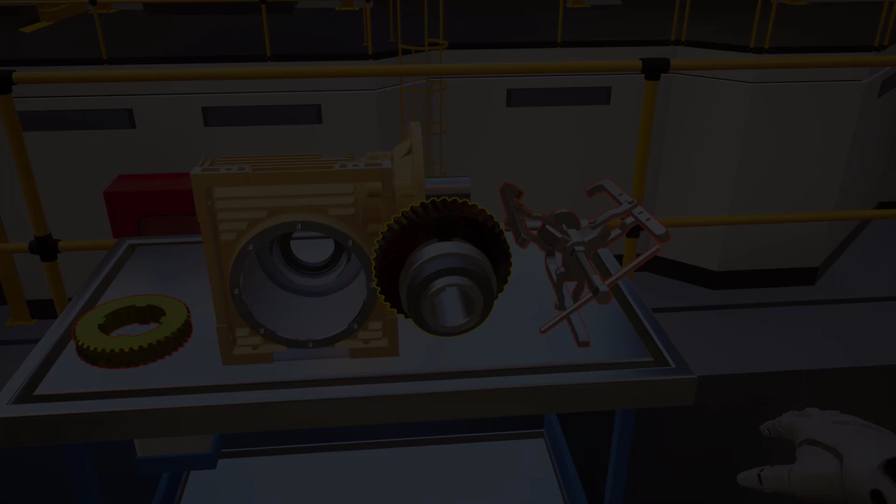In this tutorial, we are going to talk about two new features that take VR assembly to a whole new level: the utilization of subassembly, and the ability to have a custom assembly component that is controlled through the training builder.

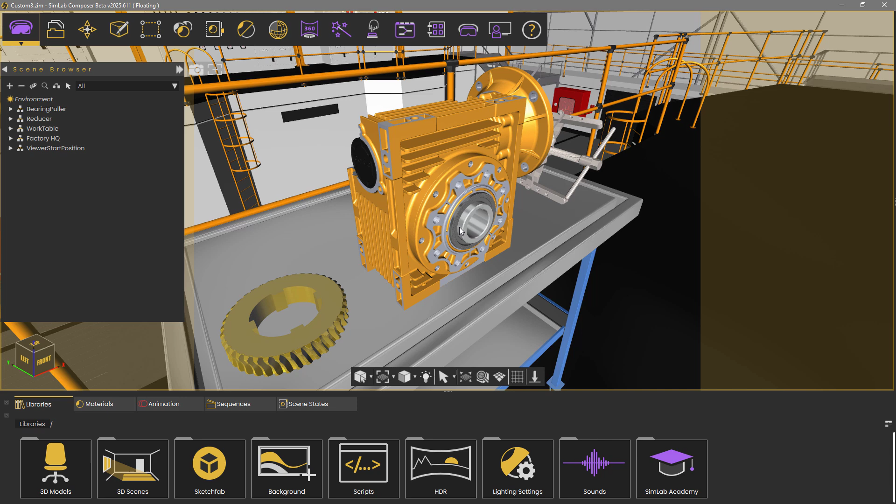What we have in the scene is a reducer, which we are going to disassemble using the VR assembly system. Let's talk about the order in which the components are going to be removed. First, we are going to remove the cover. I'm going to select it and press H on the keyboard to hide it and reveal the components beneath it.

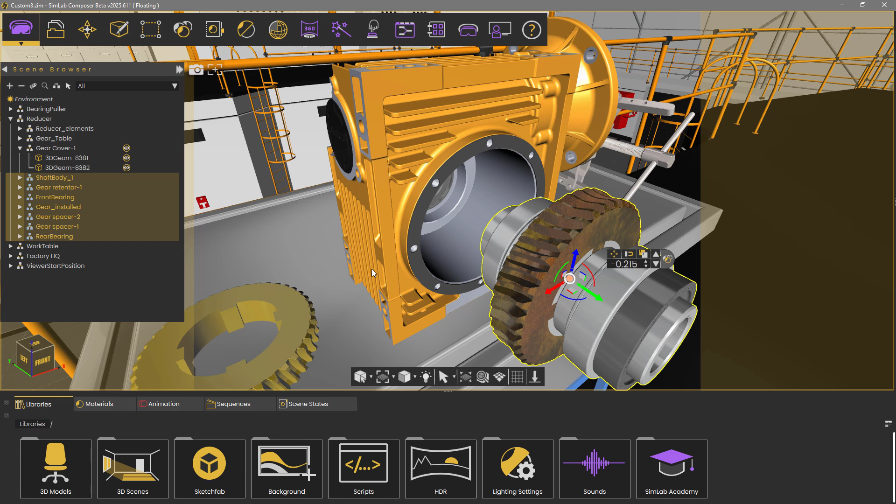Next, we are going to remove the inner components together as a single component, or subassembly. Then we need to take them apart one by one until we reach the rusty gear. Once we remove the rusty gear, we are going to install the new gear, then put the components back in the same order. Let's first create the subassembly.

We are going to select all the components that are going to move as a subassembly, and from the objects tree, right-click and select Add Parent. Rename the newly created parent to a suitable name. This is it for setting up a subassembly.

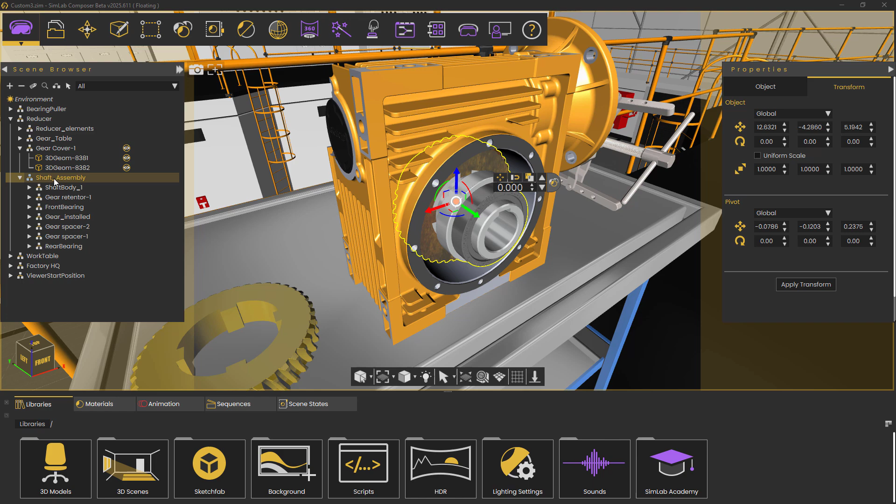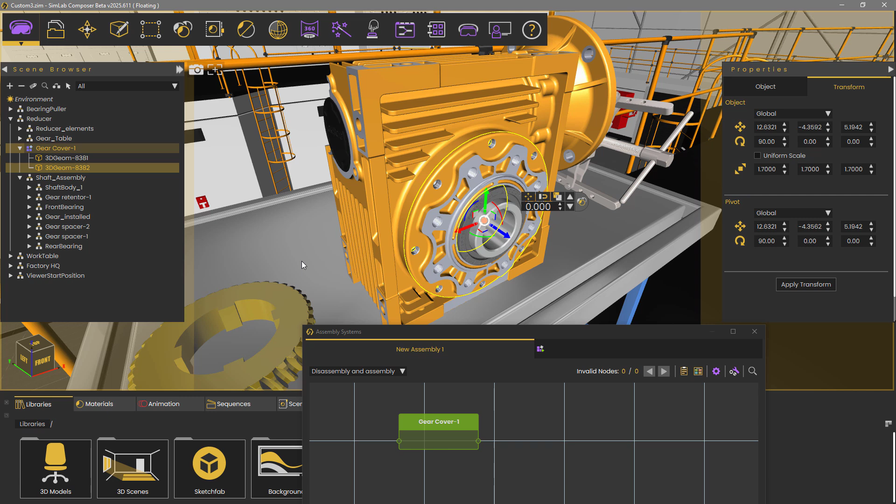Next, we are going to create the VR assembly system. From the Interactions menu, select VR Assembly System. The first component that we are going to remove during the VR experience is the cover, so select the cover and drag it into the VR assembly diagram to add it as the first component in the assembly system. I'm going to press H on the keyboard to hide the cover and gain access to the components behind it.

The next component to remove is the whole subassembly we created, so select it from the object tree and add it to the diagram and connect the cover node to it. Once the whole shaft is removed from the reducer, we can take it apart one component at a time, starting with the retainer, so add it to the diagram and attach it right after the subassembly. Again, I will press H on the keyboard to hide the part.

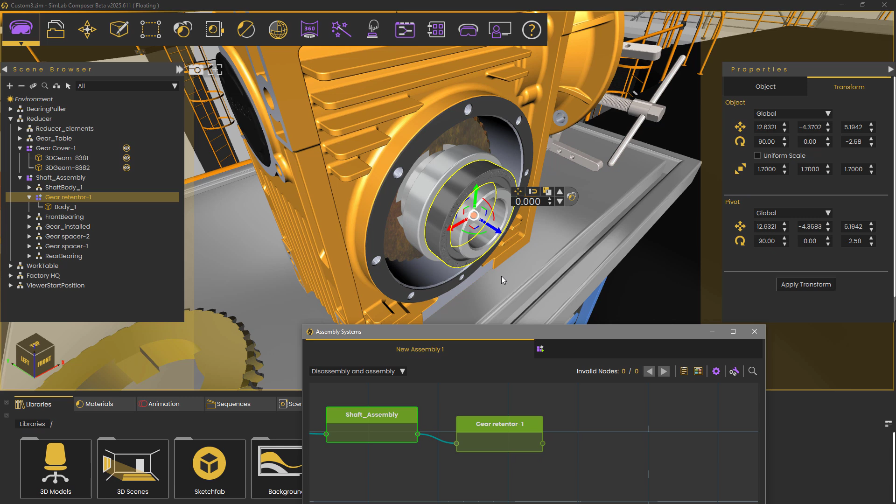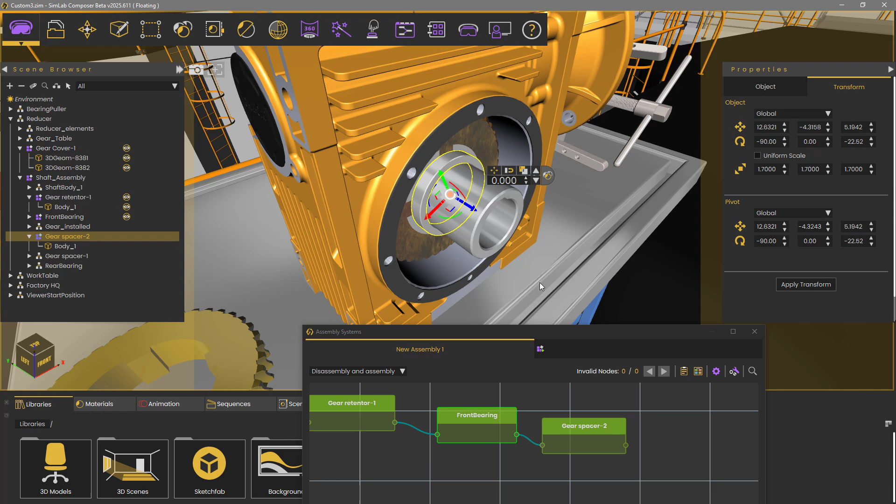Next we will add the bearing. Select the bearing component and add it to the diagram, then hide it. Right behind the bearing is a spacer, so select the spacer and add it to the diagram and connect it to the assembly chain. Lastly, we are going to add the rusty gear as the last component in the VR assembly system, so add it and connect it to the spacer node.

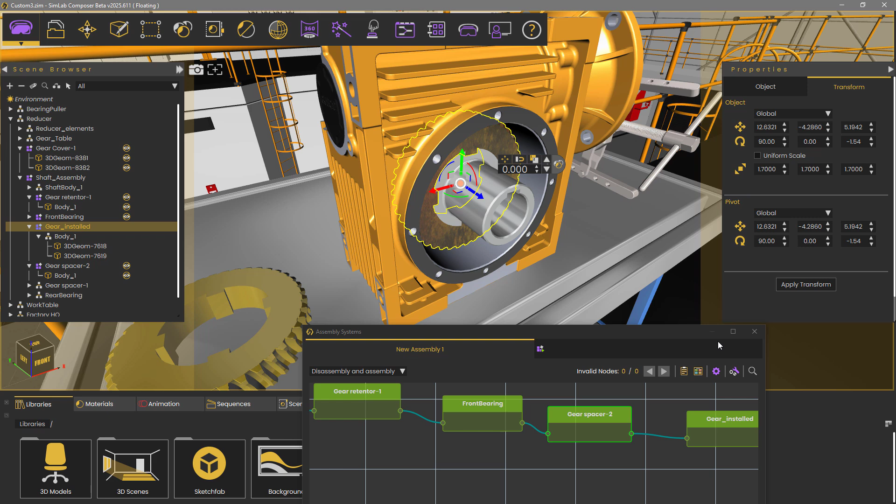To be able to replace one component with another, we need to define them both as a single component type. Click on the Assembly Tools and Components button and go to the Components definition. Type a new component type in the field and press Enter to create it.

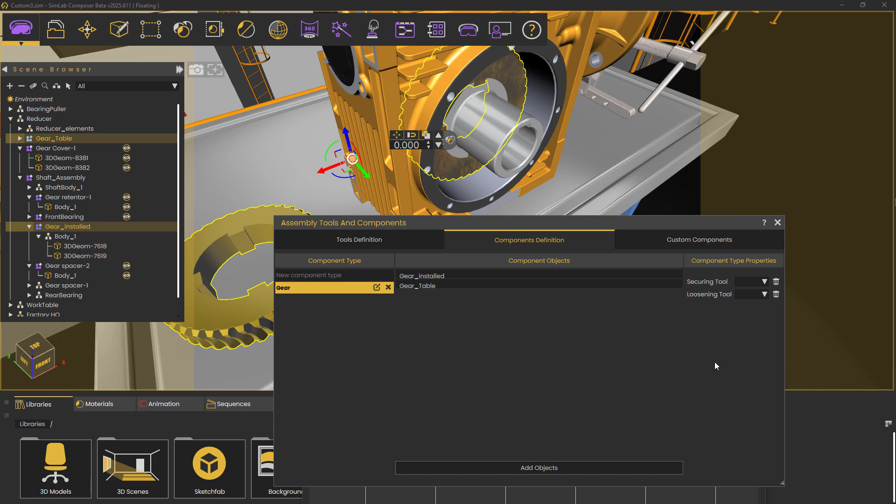Then select the newly created component type, and from the object tree, select both the rusty gear component and the new component sitting on the table, and add them both to the component type list. We are not going to be using tools for the removal, so leave the tools option blank. Once multiple components are defined as a similar type, they can be used interchangeably within the VR assembly system.

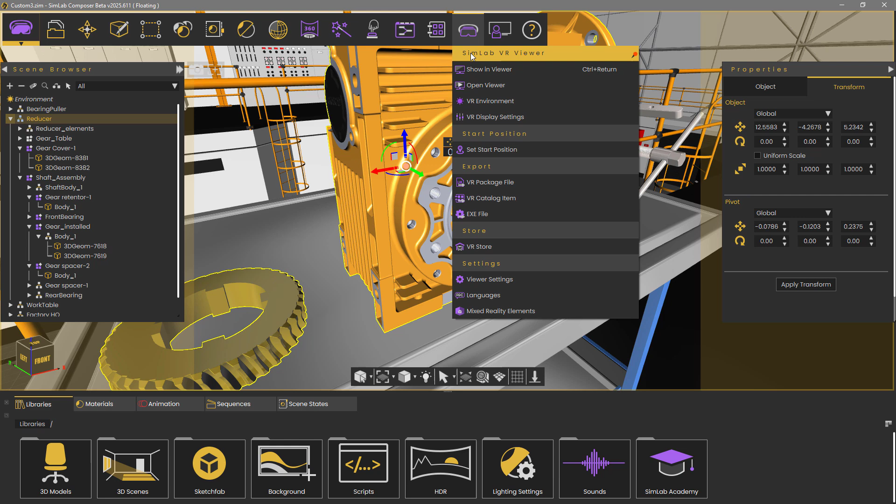Before running the VR experience to test out our progress, make sure you select the highest level of the reducer assembly and press S on the keyboard to show all the components that we previously hid. From the VR Viewer menu, select Show in Viewer, then select Desktop Mode.

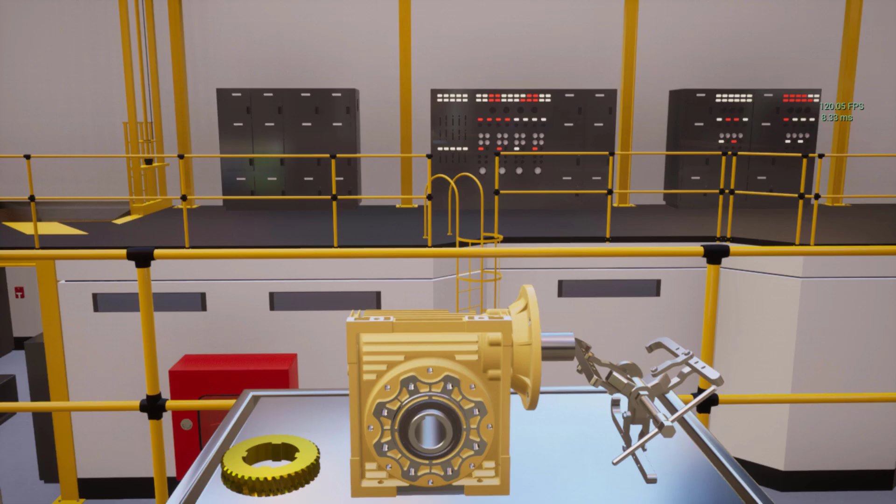As you can see, right after removing the cover, the user has to remove the whole subassembly, and then he can start removing the components one by one.

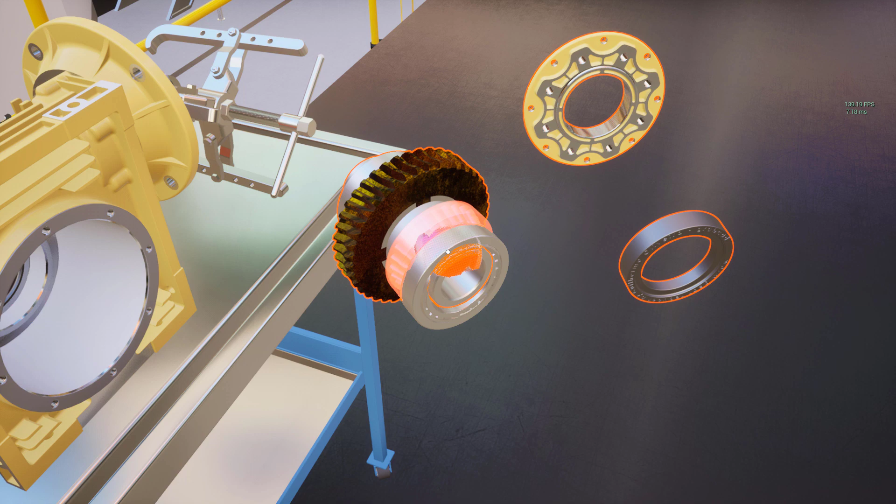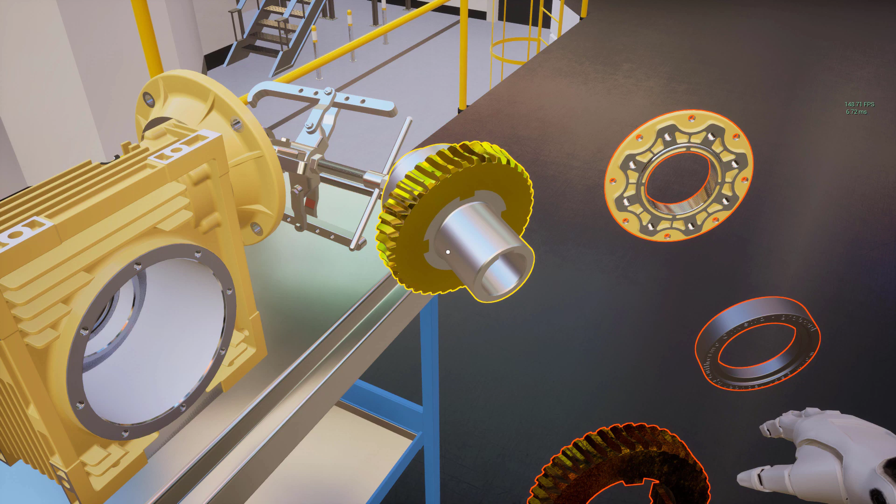Similarly, place the components back together following the same order, with the subassembly being put back as a single component before placing the cover back on.

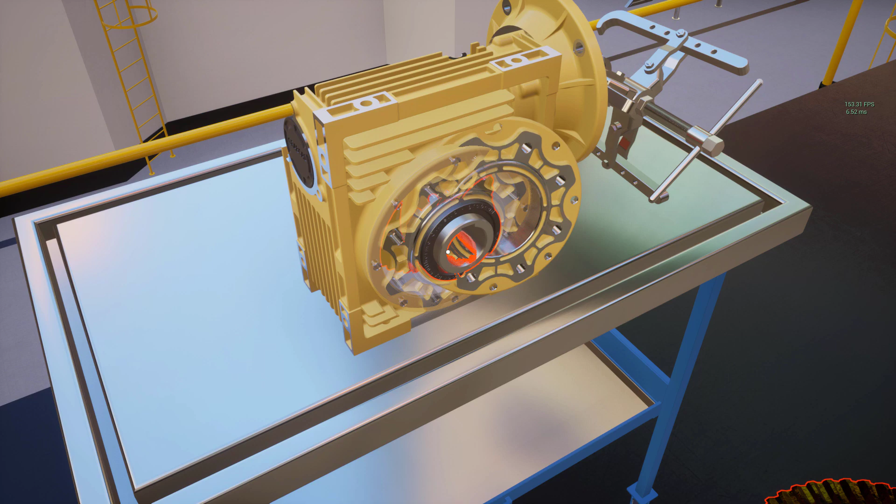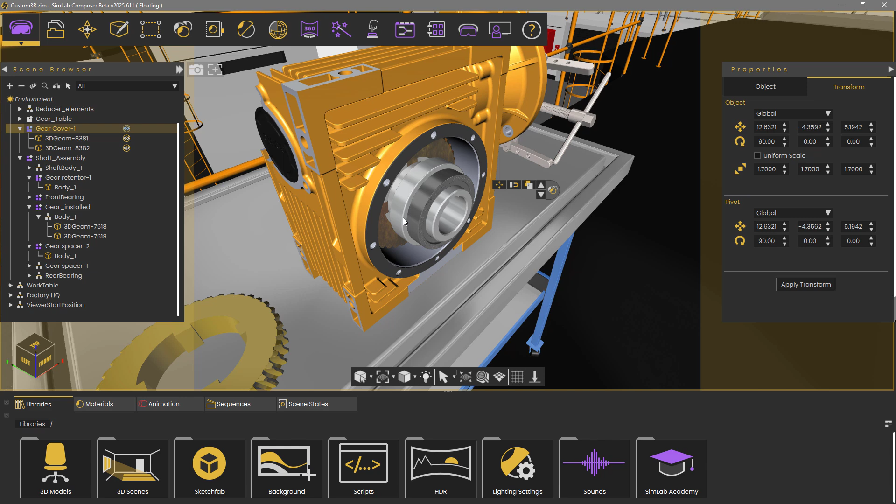In the second part of the tutorial, we are going to talk about custom components. Custom components allow designers to define specific conditions under which a component can be assembled or removed. These conditions can be set using the training builder, enabling the integration of more complex procedures and interactive tools into the VR assembly system. In most mechanical designs, bearings are usually removed using a puller or a hydraulic press, since

they are usually tightly fit. In our example, we are going to use a bearing puller to remove the bearing instead of just removing it by hand through the custom component feature.

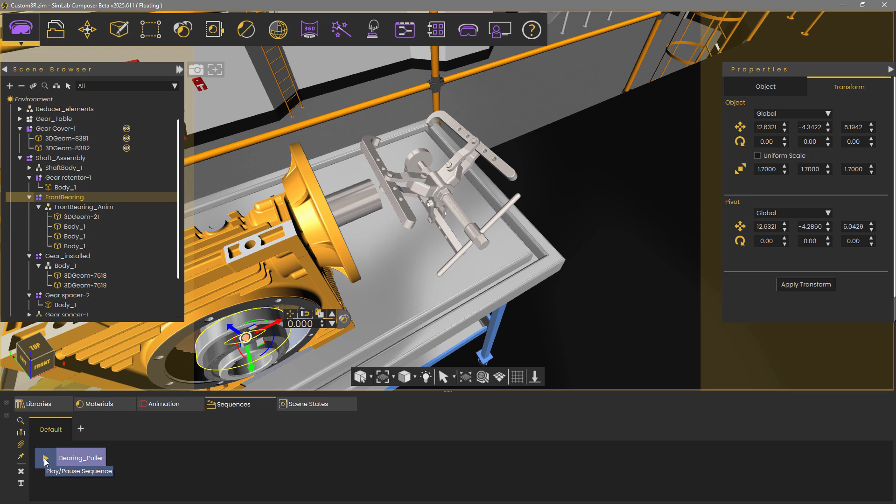If you were to go to the Sequences tab in the bottom panel, you will find an animation sequence for the bearing puller, and we are going to utilize this animation in the custom component interaction.

Setting up the use of the bearing puller can be divided into two aspects. First is a visual aspect where the puller needs to be placed at the shaft and for the bearing to be pulled out when the animation plays. The other aspect is setting up the training builder's logic.

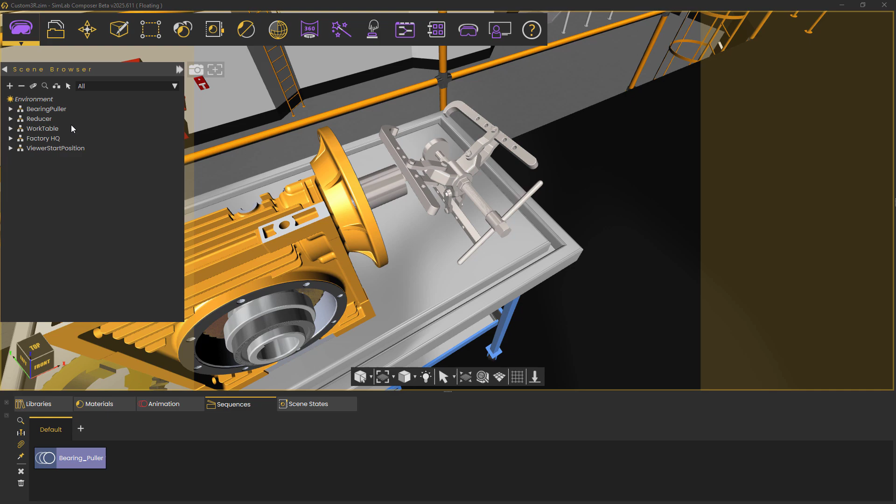We are going to begin with the visual aspect. Select the bearing puller and press I on the keyboard and click on the shaft to snap the puller into that location. Then try to position it as if it were in contact with the shaft at the center.

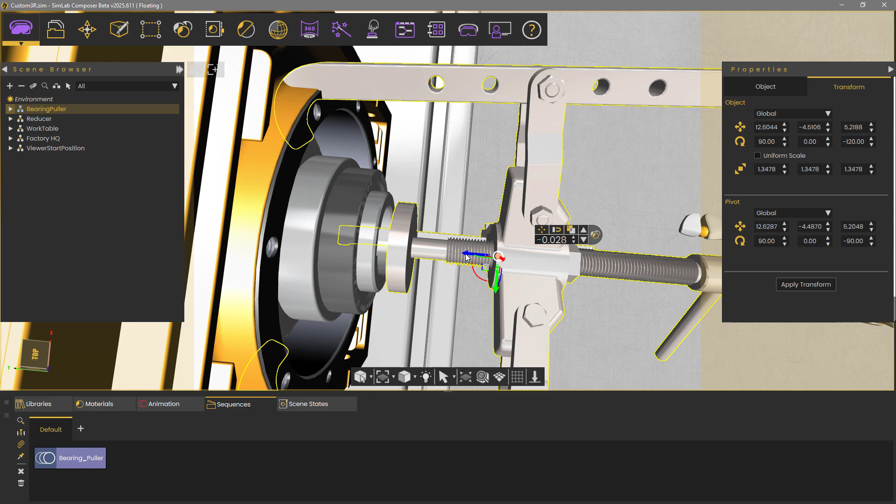Select the base of the bearing puller. The base of the bearing puller remains in contact with the shaft, and the jaws are retracted, pulling out the bearing while moving. What we are going to do now is to animate the bearing as if it were being

pulled by the jaws. Hold Shift and click to add to the selection the bearing assembly at the level named front bearing_anim. The reason for selecting a level lower than the assembly level is that we are later going to use scene states at the top level to place the bearing back in its place during the assembly process.

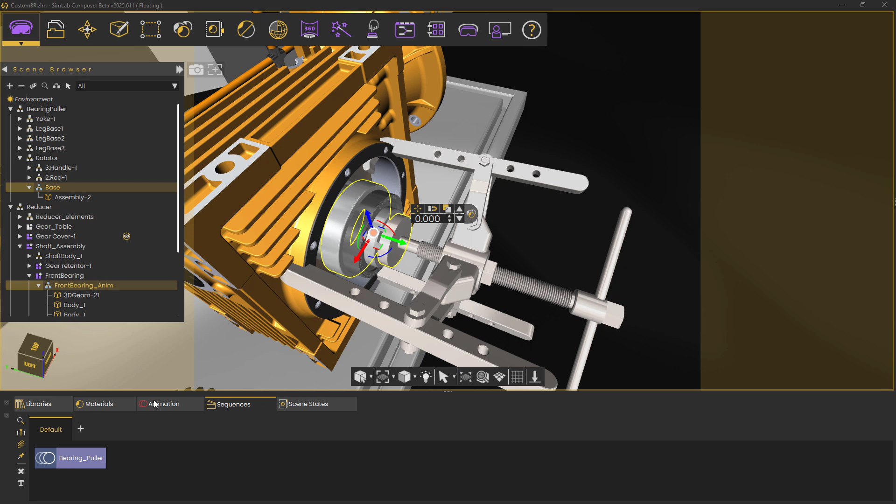With both the base and the bearing selected, go to the Animation tab and move the current time slider to frame 40, which is the frame where the pulling animation starts. Since we have selected both the puller and the bearing, you can see that we can view and adjust the animation for both of those objects.

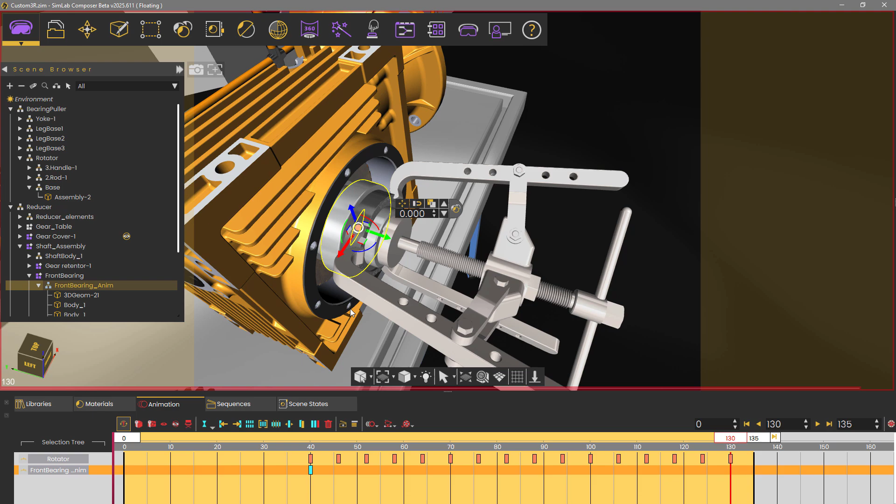Now click on the front bearing tab in the animation timeline to select it, then click Capture Keyframe. Move the time slider to frame 130, which is the last frame in the animation, and move the bearing to keep it within the grasp of the puller jaws.

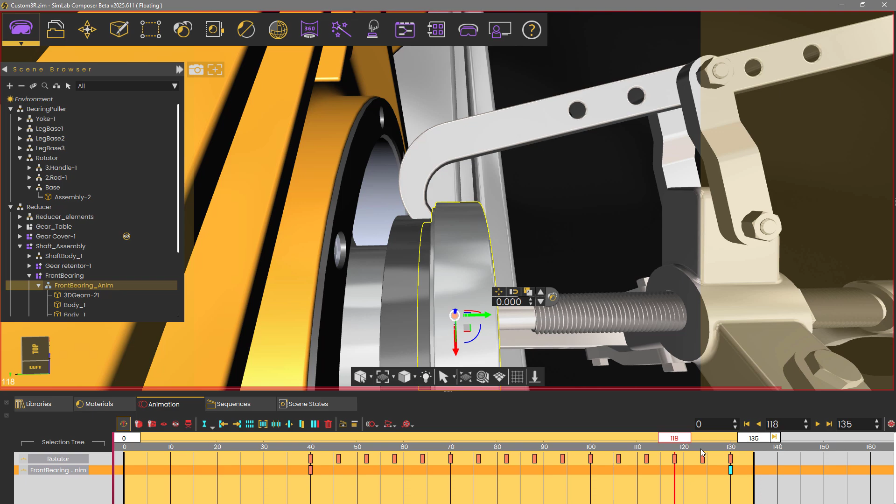Adjust the bearing's animation to match the component's animation as much as possible, and once you are done, select the highest level of the puller assembly and the bearing assembly to reveal the keyframes for the whole complete animation.

Click on Select All Keyframes button, then click on Create Animation Sequence, type in a name for the animation and click OK.

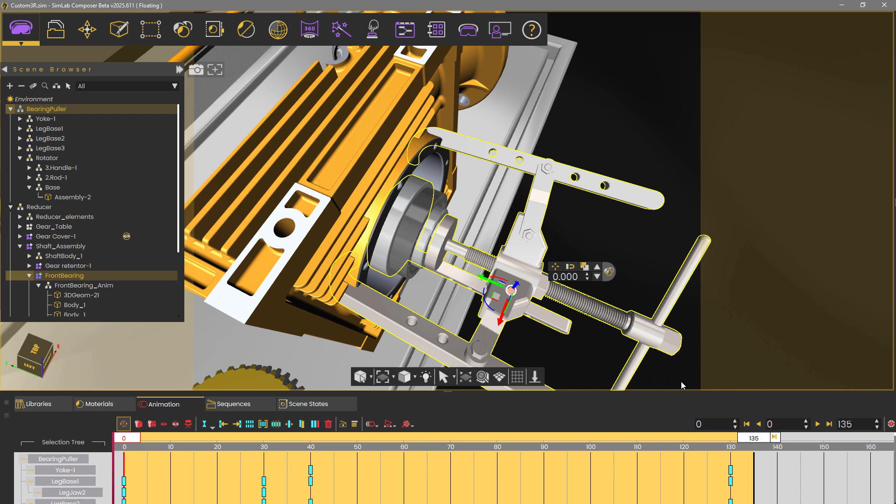You can go to the Sequences tab and play the recently created animation sequence.

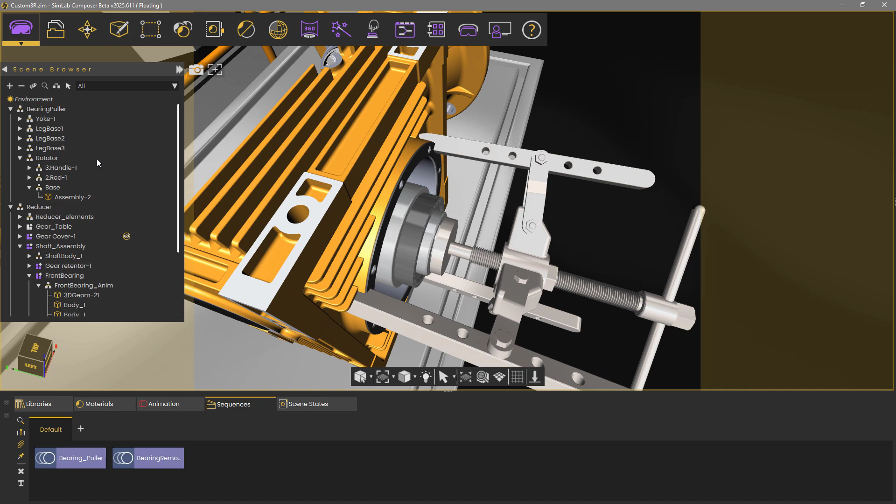The next thing that we are going to do is to establish the method for placing the bearing puller onto the shaft before we get to play the animation sequence, and to do that, we are going to use the Snap and Socket tool. With the bearing puller selected, press I on the keyboard to isolate the selection.

From the Interactions menu, select Snap and Socket. Make sure you disable the option to automatically place sockets, since we only need one socket, and leave the rest of the options at their default value, and then click Add Socket.

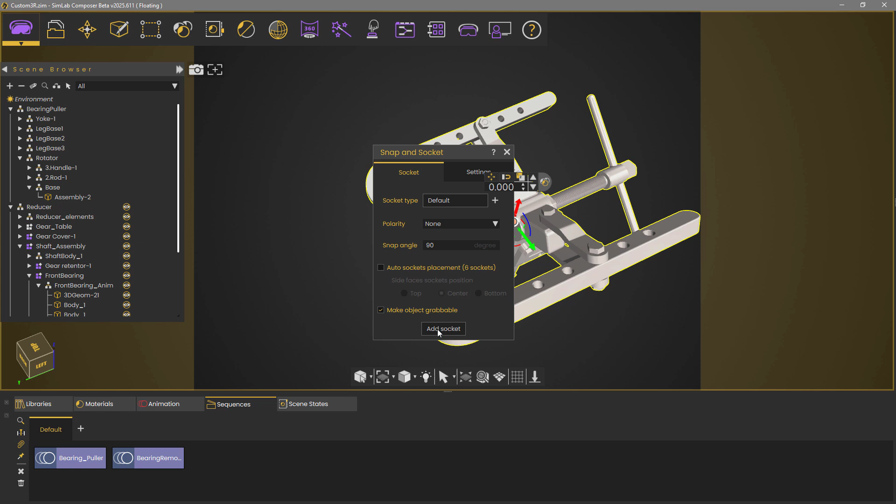This socket that has been created will serve as a magnet, where it can attach to other objects with sockets in them, and to determine the direction of attachment it uses the red arrow's direction.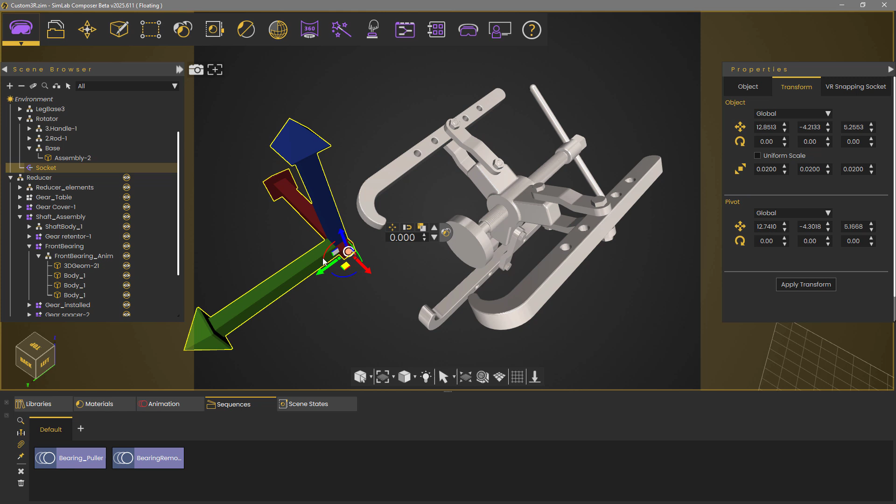So what we need to do now is to place the socket's red arrow at the center of the circular base and ensure that it points outwards, and to do that we are going to use the Align tool.

From the Move menu, select Align. Now we need to set point 1 as the center of the red arrow's base, so click on the Selection Type menu and select Pick Edge Loop.

Select the base of the red arrow and then click the color which represents the square base, which in this case is green. As for point 2, we need to select the circular base of the bearing puller, so change the selection type to Pick Center of Curvature, then click on the circular edge at the base.

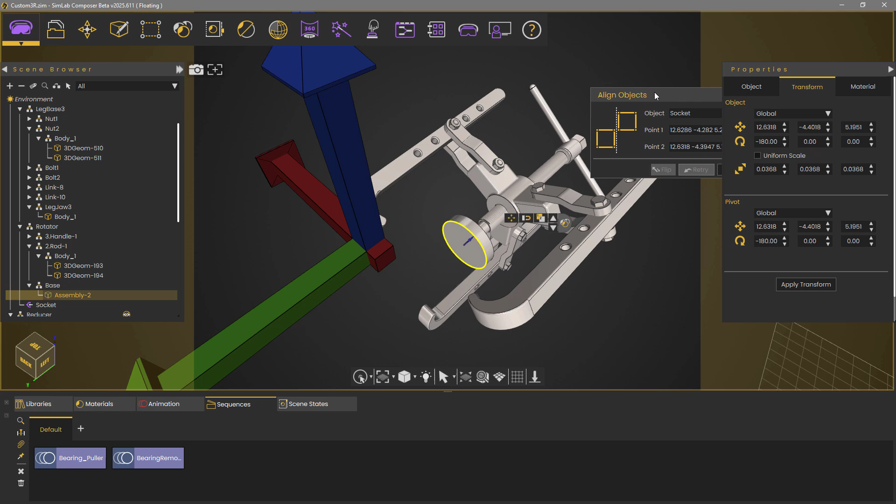Now that we have selected the 2 points, click Apply to align the socket to the base of the puller. If the object was facing the opposite direction, simply click Flip to adjust its orientation.

As you can see, the arrow is now pointing outwards from the center of the base of the puller.

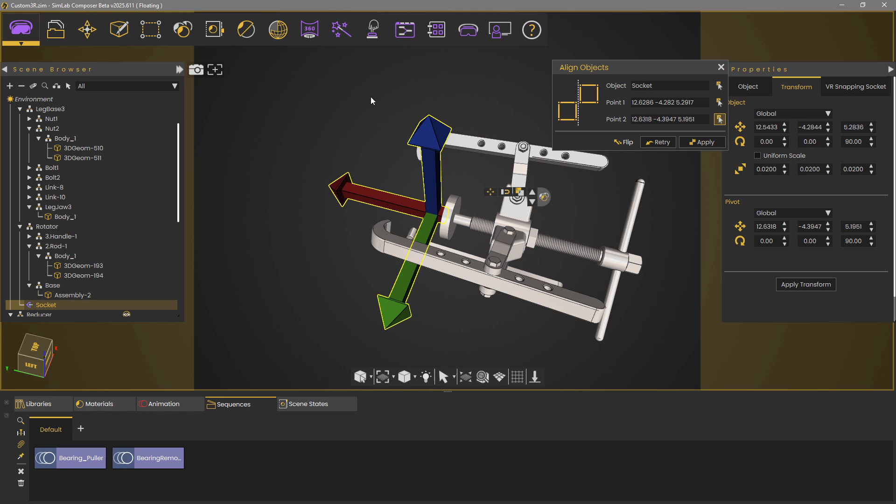We have now successfully placed a socket on the bearing puller, and we can move it to the side next to the reducer and move on to placing a socket on the shaft where the puller will be placed.

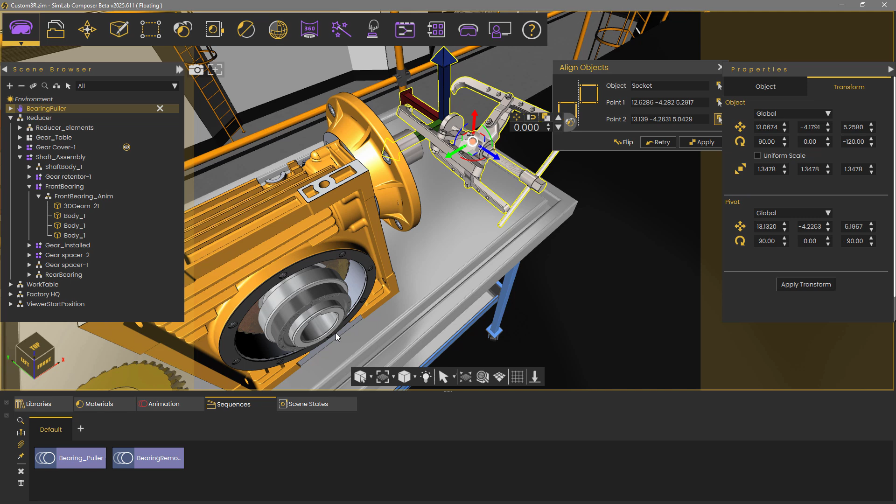Similar to what we did before, select the shaft body and from the Interactions menu select Snap and Socket. Keep the settings as they are, but toggle off the option to make the object grabbable, since the shaft grabbing will be determined by the VR assembly system, and then click Add Socket.

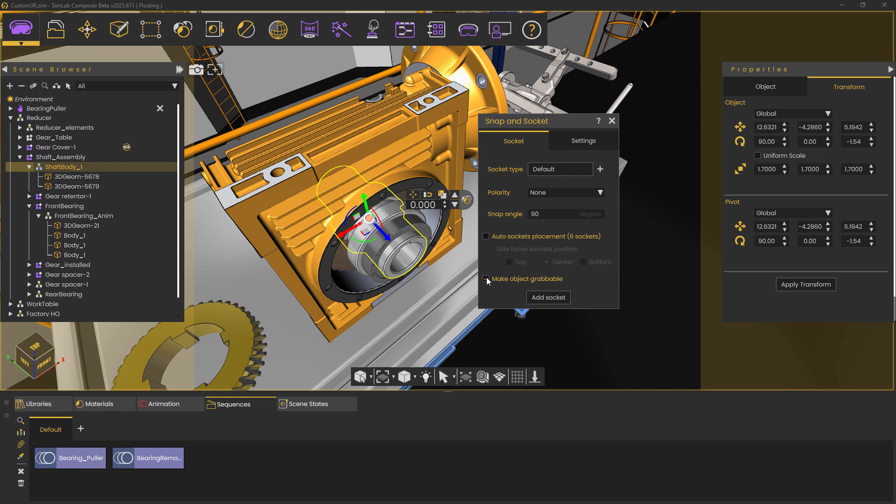Same as before, we need to align the red arrow with the center of the shaft and make sure it's pointing outwards.

From the Move menu select Align. Change the selection type to Edge Loop and click at the base of the red arrow, then select the color representing the loop at the edge.

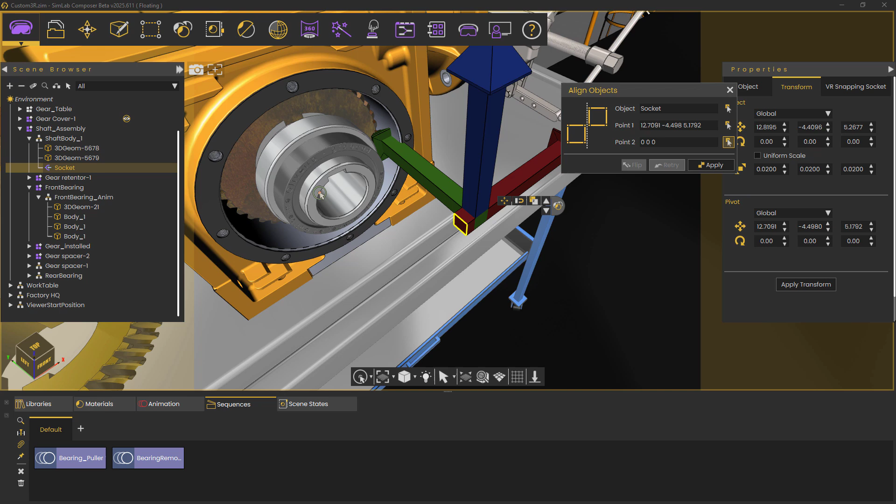For the second point, switch the selection type to Center of Curvature and click on the loop at the edge of the shaft, then click Apply. Feel free to flip the socket if it was pointing inwards instead of outwards.

Now that we have an additional socket at the shaft, the puller should be able to stick to it easily during the VR experience. Let's run the VR experience and test it out.

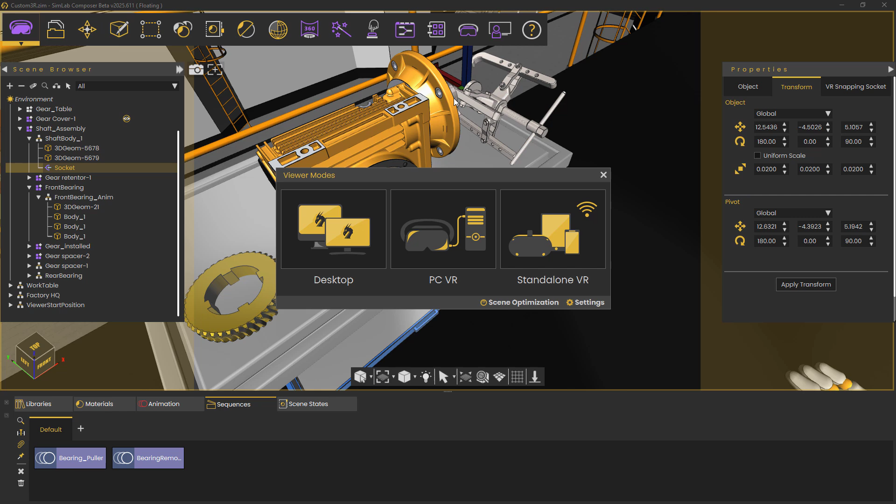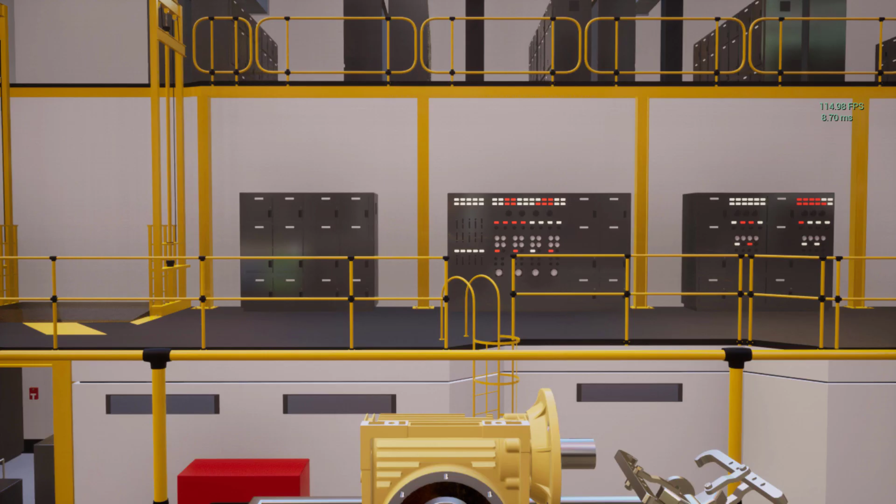Grab the puller, and notice that once it gets in proximity of the shaft, a ghost indicator of the puller would automatically appear in its place.

Upon bringing the puller into the ghost indicator and releasing the grab, the puller would be positioned there in accordance with the socket's positions.

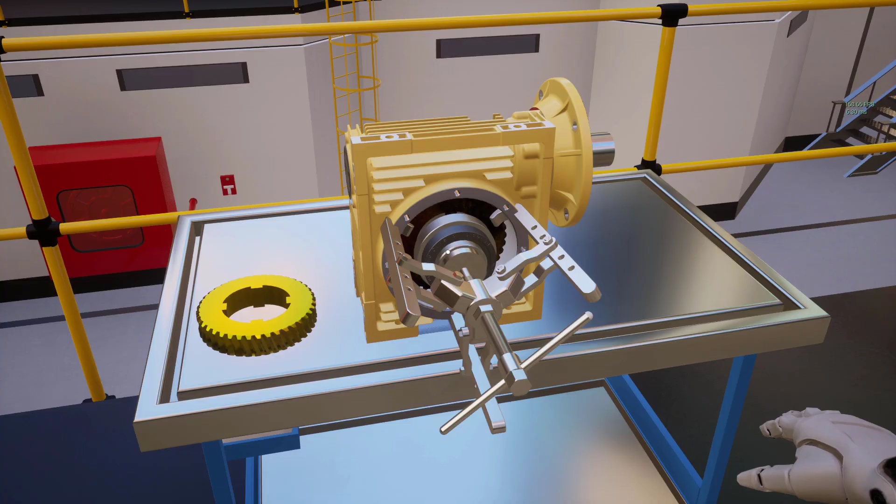Go back to SimLab Composer. The last part of the visual aspect that we need to take care of is to be able to place the bearing back on the shaft, and to do that, we are going to be using scene states.

Scene states simply capture the properties of an object and applies them whenever that scene state is applied.

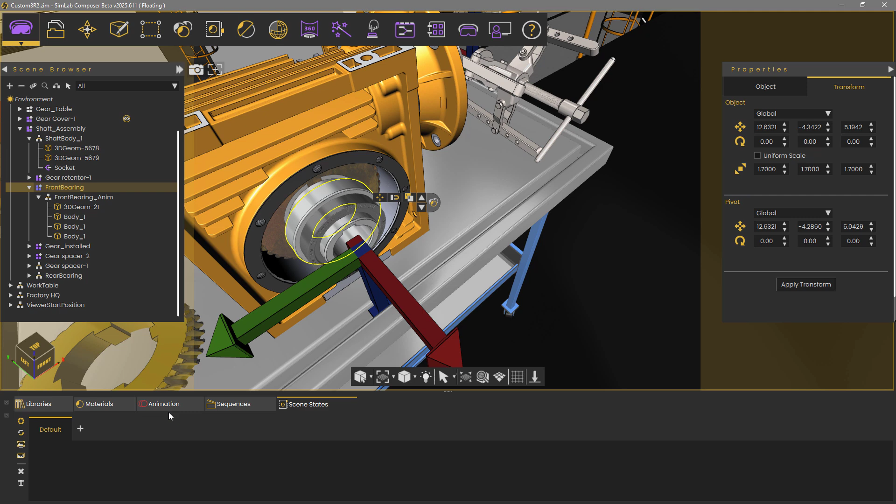Select the front bearing assembly at the highest level and go to the Scene States tab and click on Capture Scene State. Type in a name for the scene state and make sure that only the Transform and the Animate options are selected, and click Capture.

Now, if the bearing were to be moved during the disassembly process, it can be placed back on the shaft by applying the scene state.

We are done with the visual aspect of creating this custom method of removing the bearing, and we need to go to the second aspect, which is setting up the training builder logic to control the assembly.

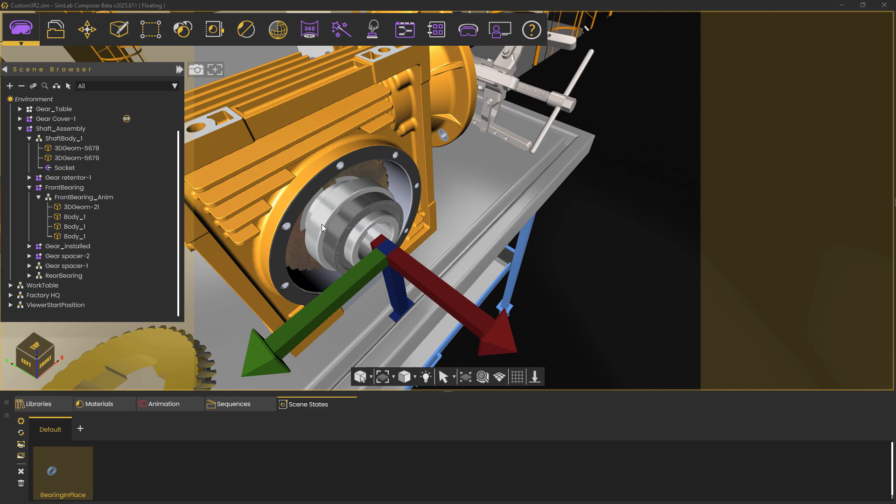And the first thing we need to do is to set the bearing as a custom component. Go to the Interactions menu and select VR Assembly System.

Click on the Tools and Components icon and go to the last tab named Custom Components. Select the front bearing component from the object tree in SimLab Composer and then click on Add Custom Component.

Notice that a slightly different icon has been given to the front bearing in the object tree, indicating that it now has a special status as a custom component.

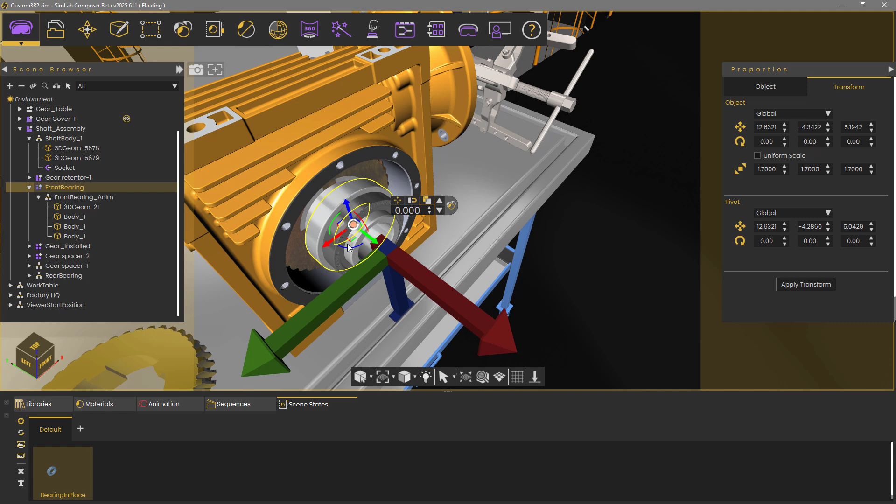Now we move to the second aspect, which is setting up the training builder, so open the training builder.

Looking at the components we have, we know that the bearing puller should be snapped at the shaft after the gear retainer has been disassembled.

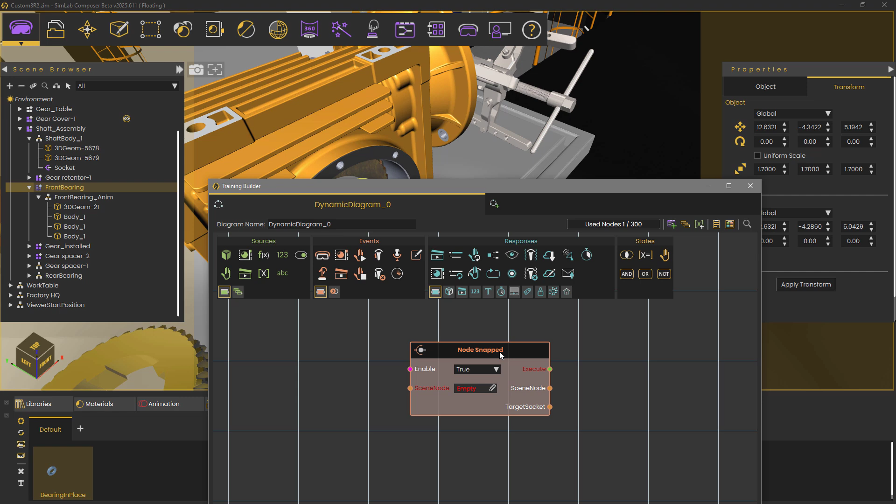Right-click in the Training Builder diagram and select Events, then Snapping, and select Snapped. Now select the bearing puller from the object tree and attach it to the event.

This event would trigger responses once the bearing puller is snapped to any sockets, and since we only have one additional socket, we do not need to determine which socket it is.

Add a play sequence response, then go to the Animation tab and select the animation where the puller and the bearing are animated and attach it to the response.

Next, we need to tell the assembly system that once the animation is played, consider the bearing to be disassembled. So right-click in the Training Builder, and from the Responses menu select Scene Node, then Assembly, then Set Assembly State.

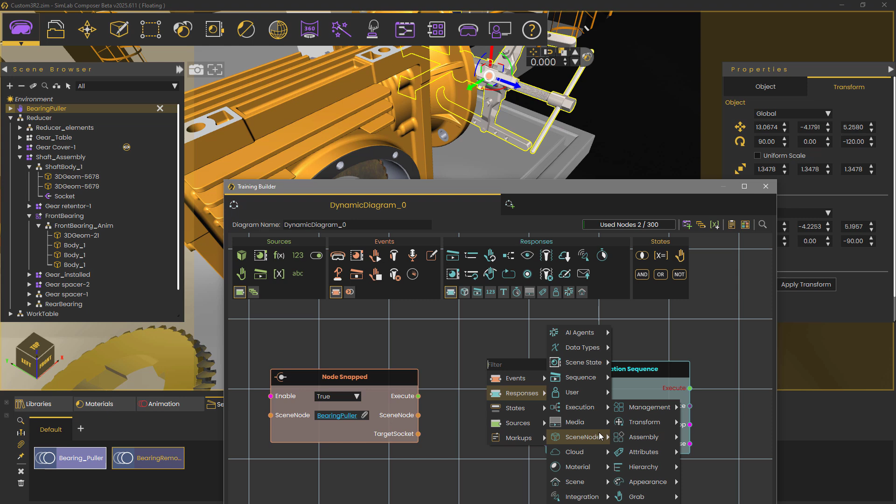Keep in mind that when dealing with custom components, it is up to you to decide when to set the custom component state as assembled or disassembled.

Select the front bearing and attach it to the assembly state response, and change the state to fully disassembled. Connect the responses to the event.

Add a change grabbable state response, since we need the bearing to become grabbable once removed, and attach the front bearing to the response. Now, if we were to connect all the responses to the event, the front bearing will become grabbable and considered disassembled the moment the puller is snapped into position.

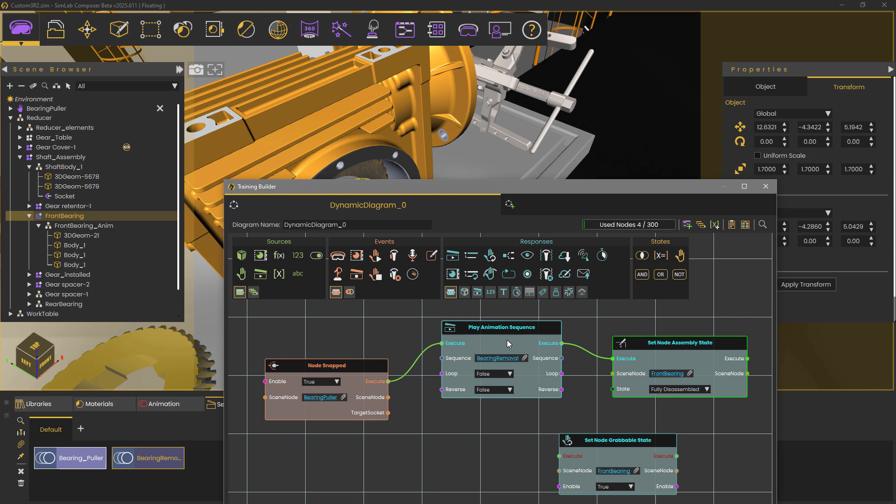But what we want is for the bearing to become grabbable once the animation is over, so what we are going to do is create a sequence-ended event and attach the bearing removal animation to it. Then connect the event to the assembly state and the grabbable state responses.

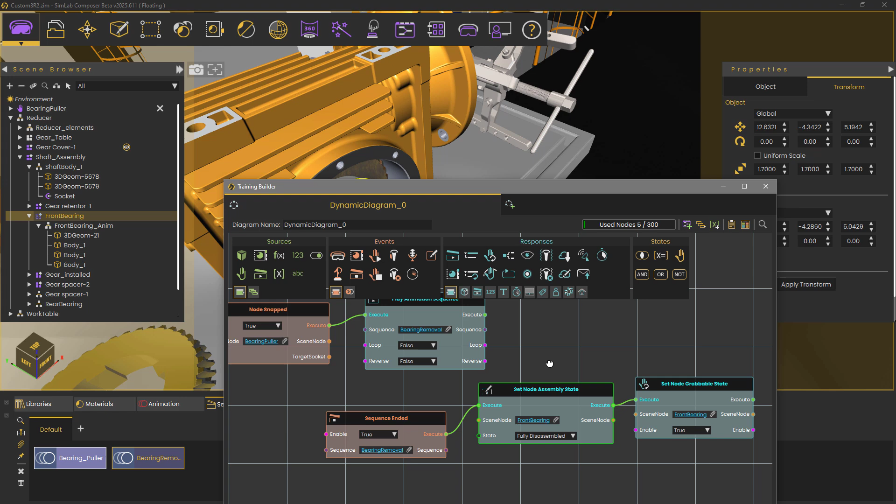What we have created so far does not ensure that the bearing can only be removed after the retainer has been removed. To introduce the condition of a component removal, right-click in the Training Builder diagram, and from the States menu select Assembly, then select Node Fully Disassembled.

Attach the gear retainer to the state node, then connect the output Boolean channel to the node snapped event's Enable channel.

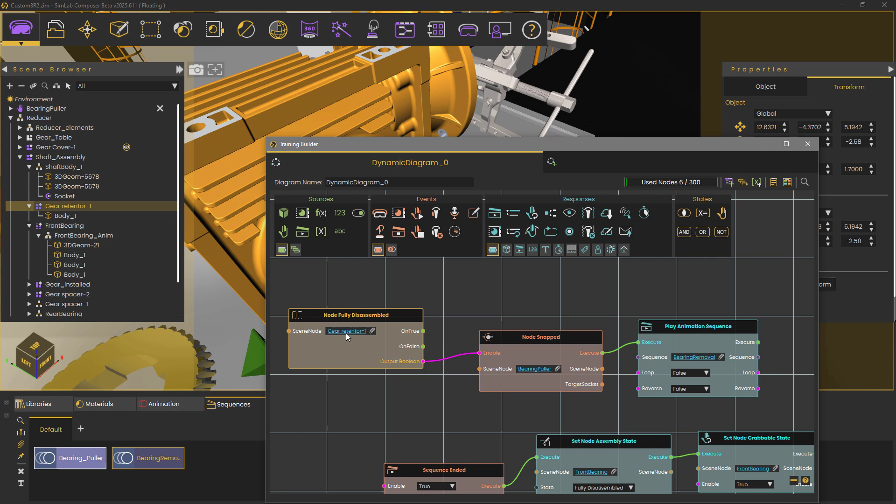What we now have is a system where once the gear retainer has been disassembled, and when the bearing puller is snapped onto the shaft, the pulling animation will start.

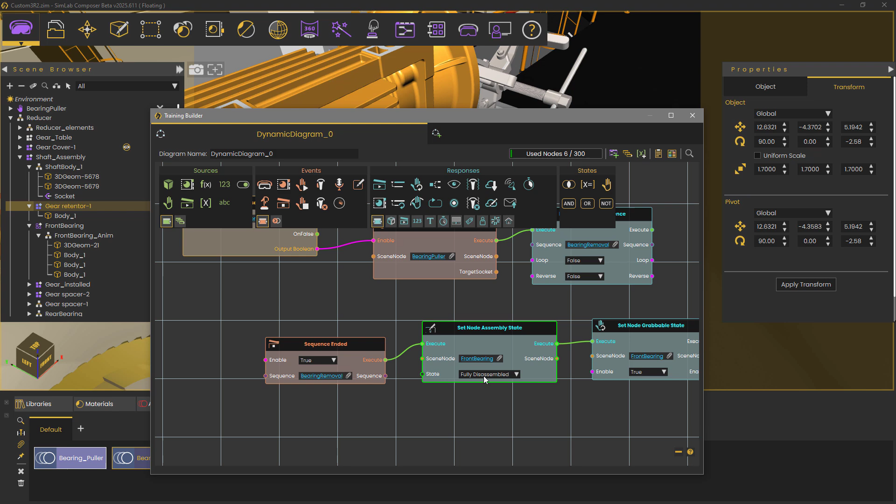Once the animation has ended, the bearing state will become fully disassembled, which in turn will allow the following component in the VR assembly system, which is the spacer, to be removed, and the bearing can also be grabbed.

Before running the VR experience, make sure you display any hidden components, then run the VR experience.

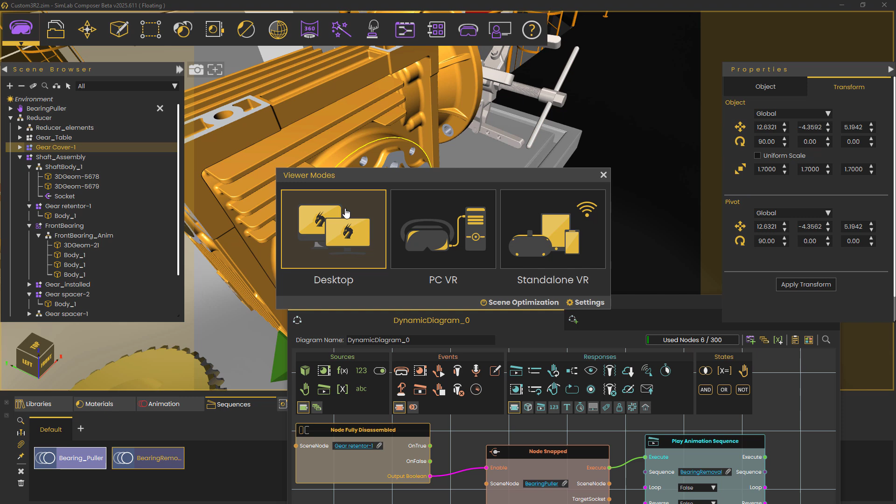Now, if we were to place the bearing puller, you would notice that the animation won't play, since we have constrained it by requiring the retainer to first be removed for the event to work.

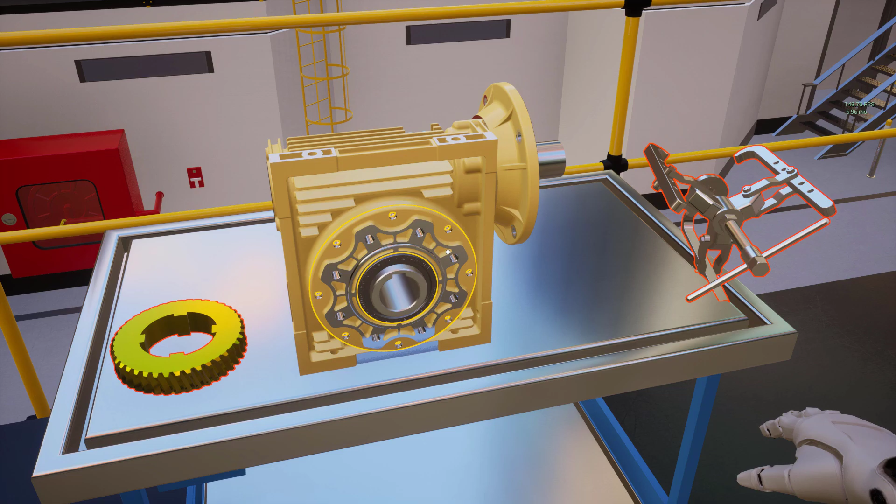Remove the cover, then take out the sub-assembly out of the reducer's box, then remove the retainer.

Notice how the bearing cannot be removed right after the retainer, since it is a custom component. Place the bearing puller on the shaft.

Once the animation is complete, remove the bearing puller and then remove the bearing from the shaft.

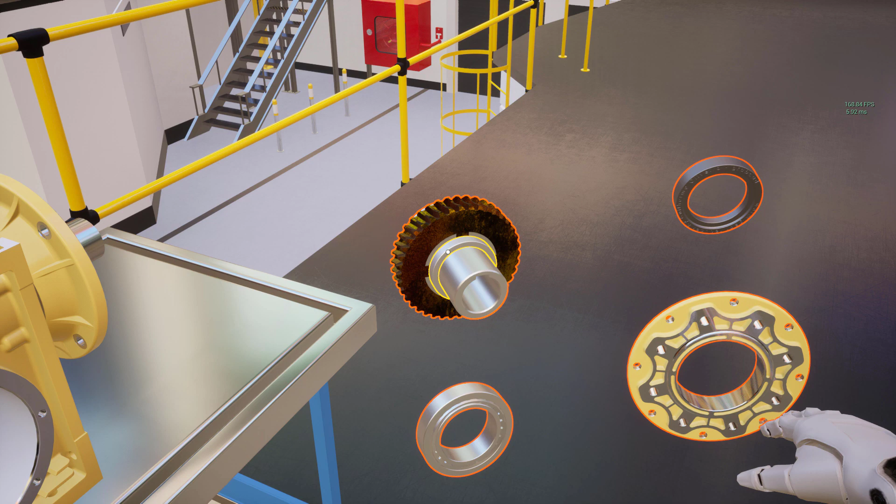Proceeding with the remainder of the disassembly process remains unchanged, but when we get to assembling the parts again, you will notice that the bearing cannot be assembled since we didn't set up the Training Builder's logic for the assembly of that custom component. Go back to SimLab Composer.

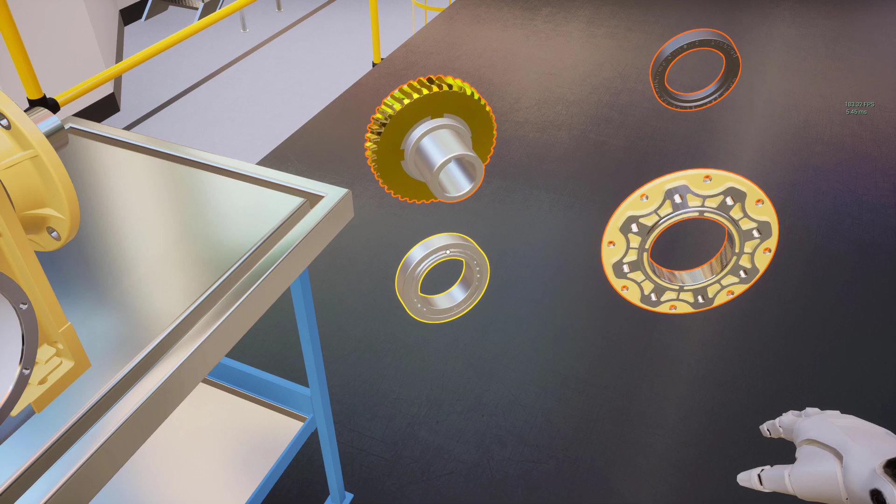Let's first hide the cover again to expose the components behind it. Now we need to create an event that once the spacer is installed, the bearing can be put back in place, using a response that places the bearing in its original place once it touches the shaft.

In the Training Builder, go to the Scene Events tab, and add a Node Enter Node event, and attach the front bearing as the first node.

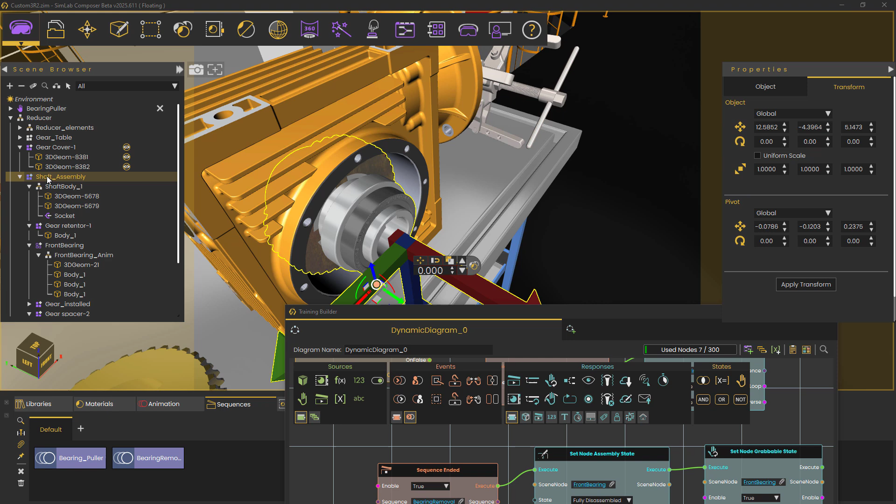Now from the shaft assembly, select the shaft body and attach it to the event as the second scene node.

Add an Apply Scene State response, and from the Scene States tab, add the bearing in place scene state and attach it to the response, then connect the event to the response.

We also need to set the state for the bearing as fully assembled and for the grabbing state to be disabled, so let's select both responses, and press Ctrl+C then Ctrl+V on the keyboard to duplicate them. Then connect the copied responses to the scene state response.

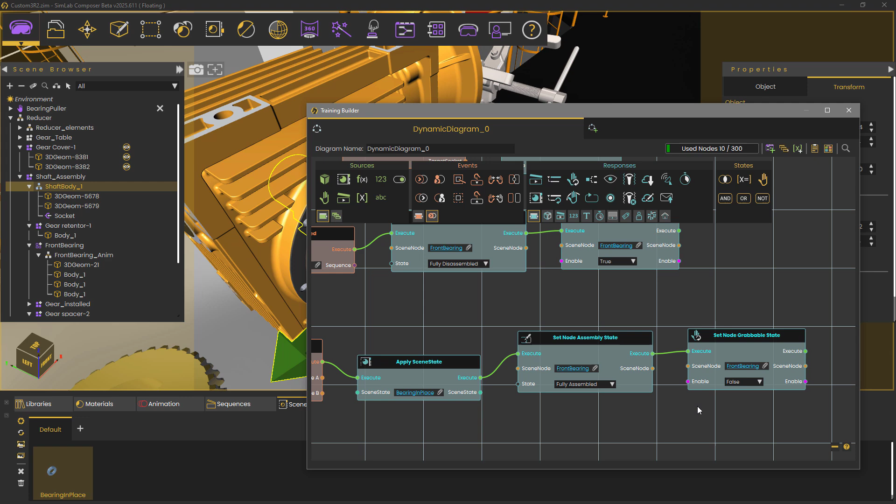Now change the assembly state to fully assembled, and the grabbing state to false. Run the VR experience to see the final result.